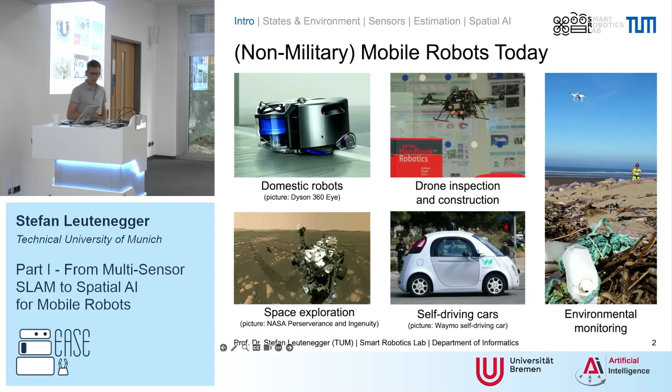So these are the sort of application areas that I work in, that I'm interested in, and that we are working on in my group. So that's what Jörn, I guess, meant with places where no robot has gone before. Maybe a bit of an exaggeration, for instance, for the vacuum cleaner, but I guess they have all in common that somehow they need some sort of localization and mapping and 3D perception.

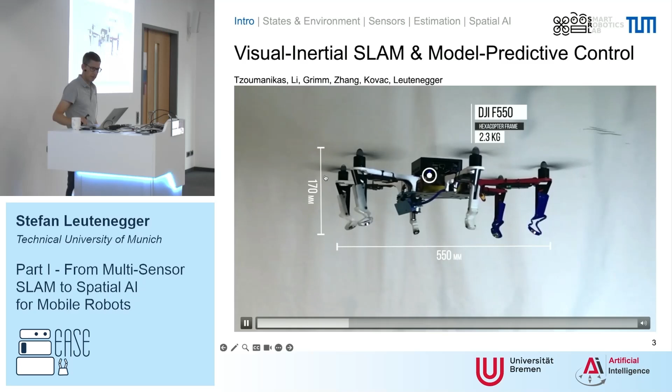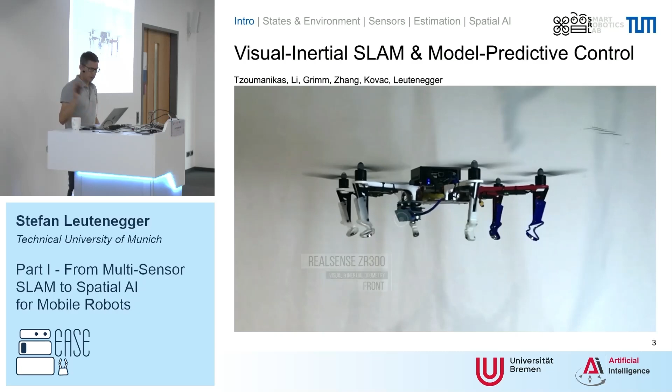And maybe just a real example that we built already a few years ago, just as an introductory example. This was for a competition. Pedro was there as well, I just learned. So we built this kind of off-the-shelf robot and equipped it with some sensors and processors. So there's an Intel NUC on here, there's an RGBD and inertial sensor in the front. And this is kind of like cheap off-the-shelf hardware otherwise. There's also a downward-looking camera.

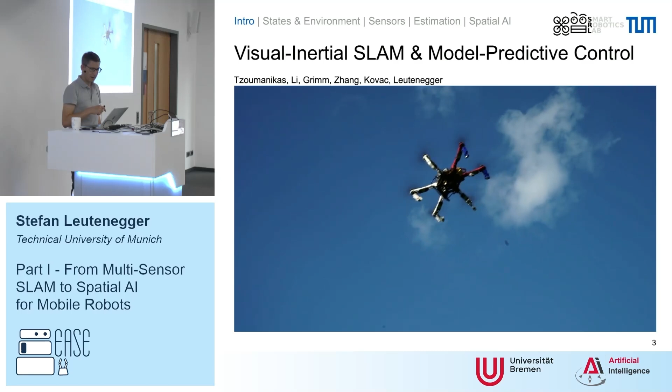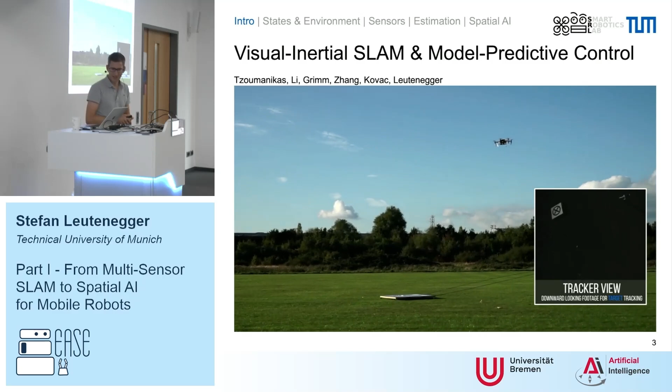Now the goal with a downward-looking camera was to try and find this moving vehicle and then actually land on it. So we did this outdoors, and actually without any GPS. We wanted this to work always, also indoors in any environment. We use some visual inertial SLAM system, and we couple it with model predictive control. We have detected now this moving target. Some people had to run quite a bit on this day, and then it approaches it and lands on it.

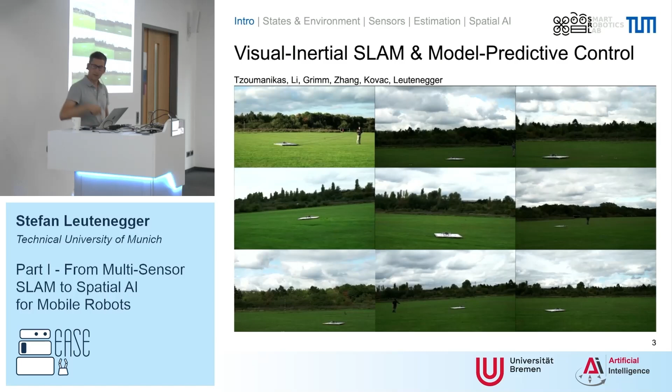So it's actually quite classical stuff, right? Probabilistic SLAM, model predictive control, but it's not so easy to actually get it done. It has to work in all kinds of conditions. You have different wind, you have different illumination. This was still back in London, so sometimes you would even have some sun, and it has to be able to cope with that. So this is just to give you an example of the kind of things that you have to do. This was fully autonomous, right? For the competition, you were only allowed to press one button, and then the rest had to be completely autonomous.

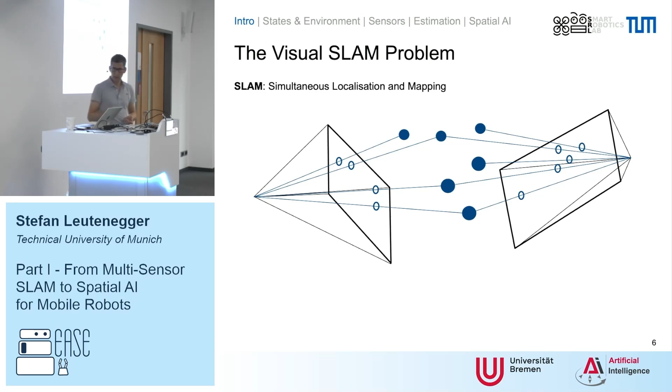Now I will be mostly talking about SLAM and what I call spatial AI here. So let's just look at the very basic SLAM problem. I'll talk about this in a little bit more detail. You assume there is some kind of a 3D structure in the world, some kind of a map, say there's a couple of key points. Now you're observing them by a camera from different viewpoints. Say you have it here first, and you move the camera, and you re-observe it, and you hope that you can now find the relative pose of both cameras, as well as the 3D landmarks here.

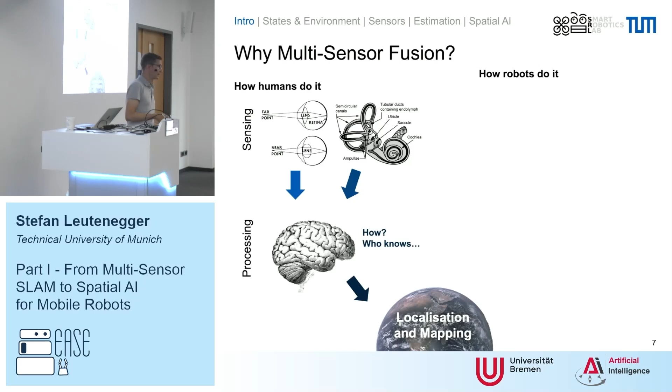Now this is vision only, and a thing that I will also be briefly talking about is that it really works well if you combine different sensors, inspired by humans. We're not just using a single camera, right? We have several sensors. We have stereo vision here, and then in our inner ear we can sense accelerations, we can sense rotation rates, we combine all of this, and we come up with an idea of how we are moving. I have no idea how this works here, right? I can only say that the way we are trying to replicate this is very similar. So we can use stereo cameras, we can use inertial measurement units, and we can use maths to basically come up with the same here.

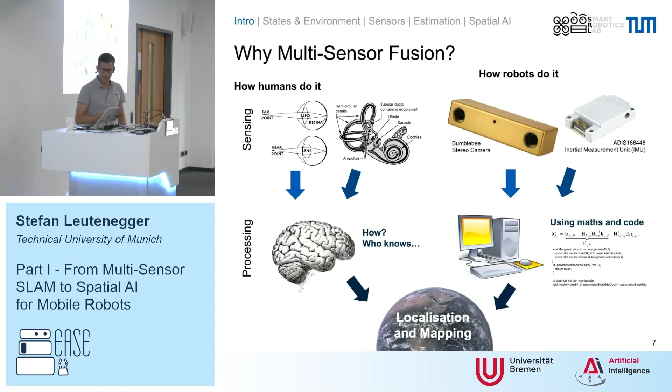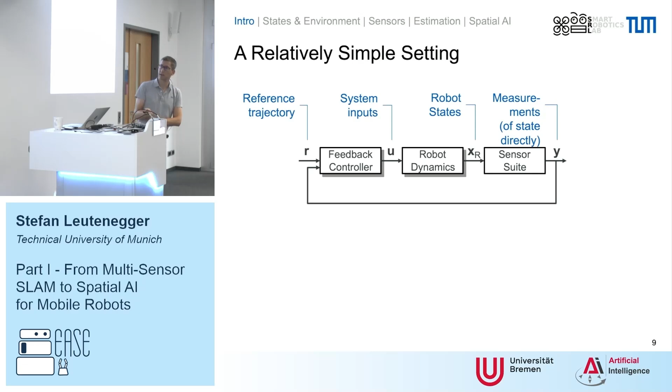Now the problem is a bit, and that's relating to what I said before, that now our measurements here are not directly something we can use for control, right? This might be an image and inertial measurements. So if you directly feed that back, it's really a non-trivial controller, and then you're in some sort of, say, maybe deep learning territory that tries to map these sensor measurements to something that tries to control a robot. That's not intuitively clear.

So what we are now trying actually to do is we're trying to have the state estimator here, right, to reconstruct something that we understand here, positions, orientations, and so on. And then this is something that we can feed back here. Okay, so that's the general idea, and then of course we can also add all kinds of planning in front of this here. Good. I guess some of this is of course repetition for many of you, so also feel free to ask questions if something isn't clear.

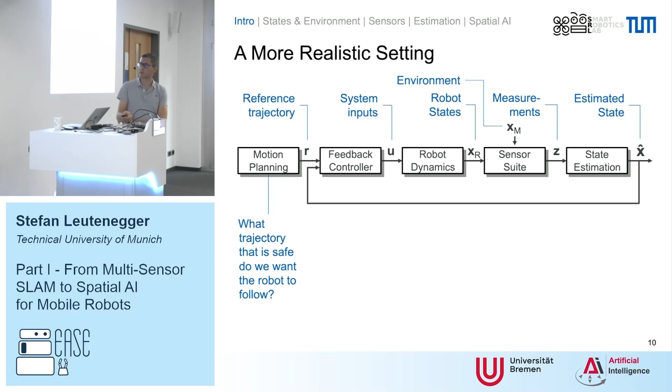Okay, so planning is perhaps all about finding trajectories that are safe, that do what we want. Control is all about finding the commands that get the robot to do the stuff that we want it to do. And then what I will always argue is that it's actually a good idea to leverage the understanding of the robot dynamics in this process of trying to control it, perhaps also in the process of finding trajectories here.

At the same time here, the estimation is all about the best explanations for the states given the measurements. And also here, it's very important that we actually understand the process of how these measurements are generated, I will argue. This helps us finding good estimators here.

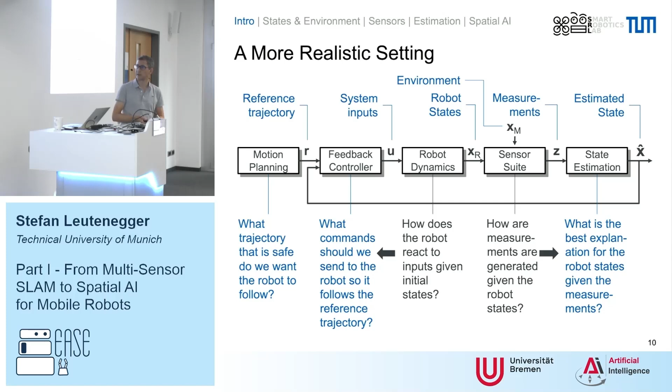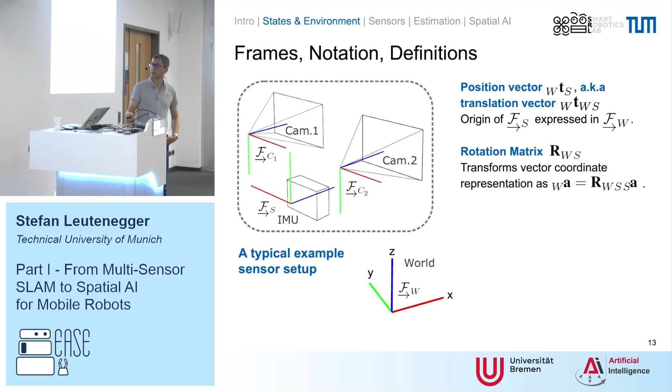So we have the inertial measurement unit, and this would be the S, and then we have the frame W, as I mentioned already. We have rotation matrices that can do the transformations of a vector, right? And for instance, we can use velocity vectors that are now expressed in different frames and so on. Okay, so this is just a bit of notation of what I'm using.

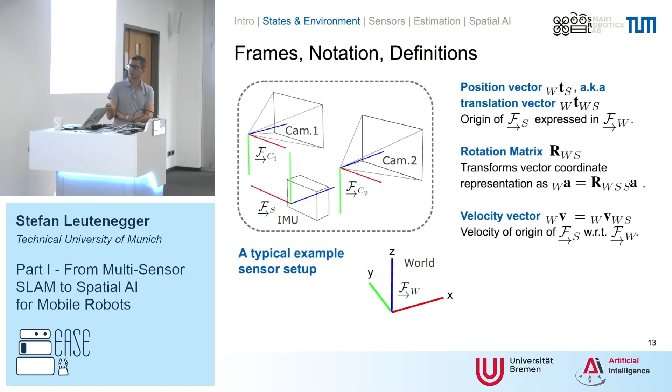And with this, you can now have, for instance, a state vector, a real-world state vector. This is actually from the example I've shown in the beginning, where you have now the position of the robot, you have the orientation of the robot here using a quaternion, you have the velocity, and then a couple of other things. So actually, it's very typical that we have some things that we really need to control the robot. So we have things like position, orientation, we might have velocity here as well.

And then there's some stuff that we just need to estimate in order to be accurate, but we're not really interested in so much. So for instance, here this is an online calibration problem where we also have the relative poses of the camera, say, relative to the inertial measurement unit here. And then what we also have is some biases of the inertial measurement unit for the gyroscope and for the accelerometers. Now this is just an example, right?

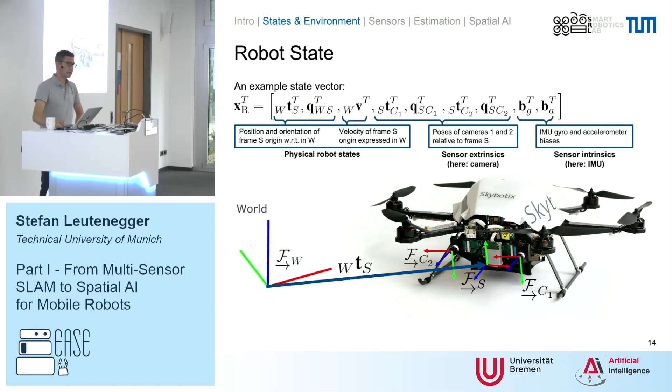But I think it tells us that often we have some kind of physical robot states we are interested in for control, and then we have maybe some extrinsics. This doesn't work so well. We have some extrinsics here, sensor extrinsics, and some sensor intrinsics that we might have. Now, what exactly this looks like, it's up to us, right? We have to decide what is the application, what do we really need, how do we want to formulate this in order to make progress.

And similarly, at the side of the map, maybe even more pronounced, there's a lot of choice. How do we want to represent the environment? And here's just a couple of examples, right? We can work with sort of more 2.5D representations of depth maps. We can use fully 3D volumetric maps. We can work with meshes. We can work with all kinds of point clouds or semi-dense point clouds. So again, it's just a bit of a reminder that we have to choose what really are the right representations to achieve the task that we want to achieve.

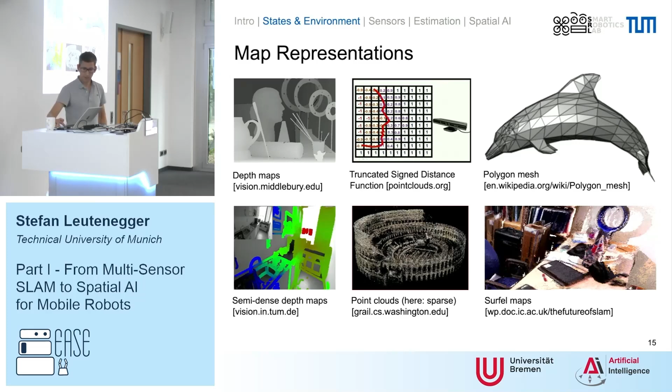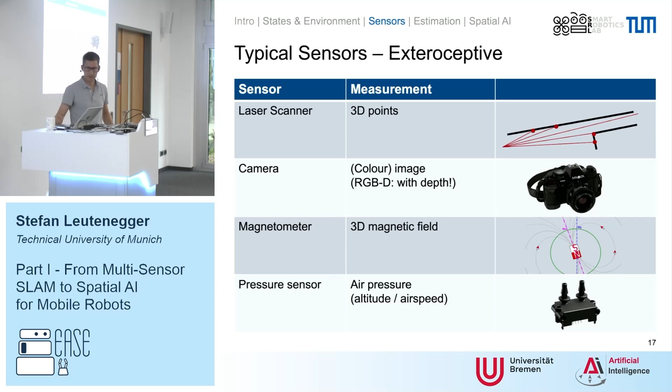Also in terms of sensors, we have to choose what are the right sensors to achieve the task that we want. We have outward-looking sensors, we have things like laser scanners, cameras, even magnetometers, pressure sensors, and then we have the more inward-looking sensors. I put GPS here, it's maybe debatable if this is inward-looking, but it directly gives you the position. And if you can get that, if you're doing some robotics outside, I will argue you should use it. There's no point in not using it. But it sometimes doesn't work, and sometimes is not available.

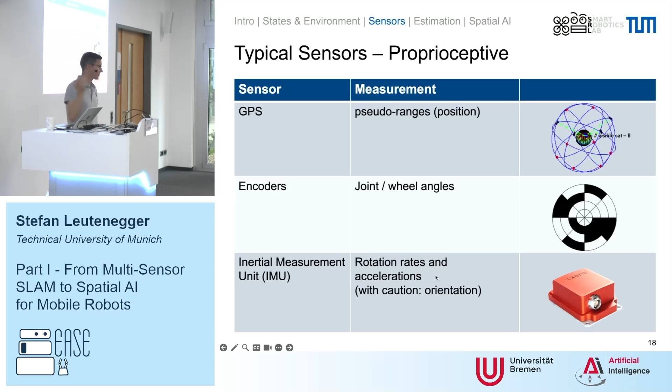We have encoders, we have inertial measurement units, right? So these are the more inward-looking sensors that we can use. Maybe important, the IMUs, these MEMS IMUs that we get, they actually measure rotation rates and accelerations. They don't measure orientations. If you get orientation out of it, it's already some kind of an estimate that has been computed.

So what are the models now for these kinds of sensors? A lot of times we have models like this, right? This is now for the IMU, say for the rotation rates, where you have here the true physical quantity, and then you have all kinds of nuisances. You might have some sort of a misalignment and scale that is multiplied in here to then generate the sensor measurement. You might have some constant bias. You might also have, unfortunately, often some moving biases that are changing over time. And then you might have some time-uncorrelated noise here, and of course some unmodeled effects. So this is the typical model that we'll be using for these sorts of sensors.

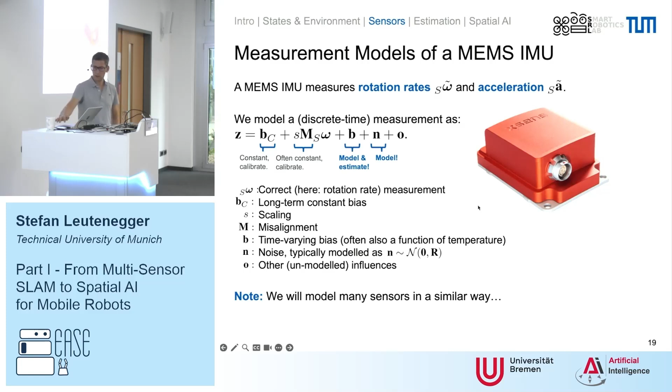Now the camera is maybe a bit more specific, and again, I don't want to bore you. I know a lot of you. So who has already calibrated cameras and worked with camera models?

Okay, so well, probably almost all of you know this. So just to go through this very quickly. The physical process is perhaps also quite complicated, right? But we use a simplified model with the image plane in front of the camera, and then we have this kind of projection here onto the image plane.

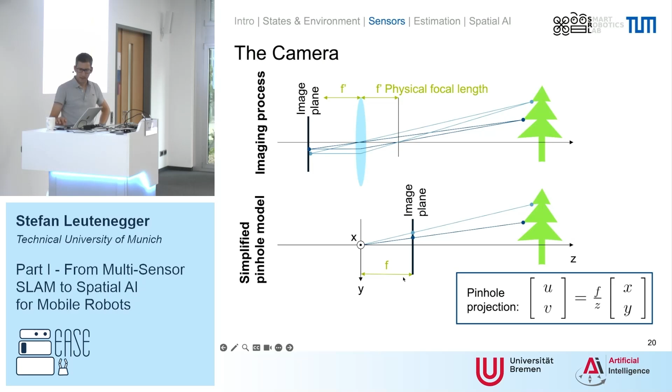And a bit maybe more specifically, the typical model that we use is in 3D, we project onto a normalized unit image plane in front of the camera. So this is just simply dividing by the z component here. And then we are applying some kind of a distortion model to compensate these unmodeled effects, which is just a mapping in the 2D plane. It's a sort of heuristic really of something that people came up with, with a lot of parameters.

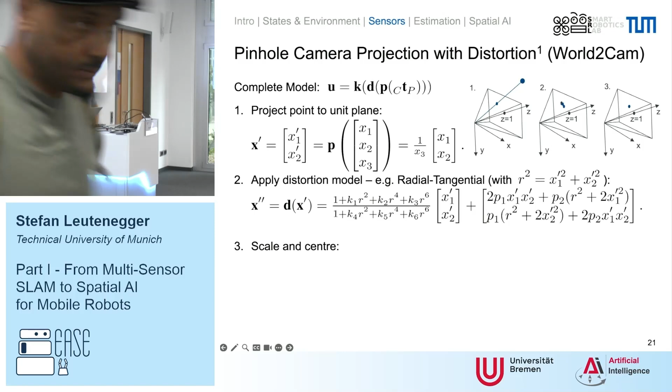And then in the end, we are applying some kind of scaling and centering of the pixel coordinates to the top left corner of the camera as a final step. So this is the kind of model that we'll be using, and we have, of course, all of these parameters that we have to sort of know.

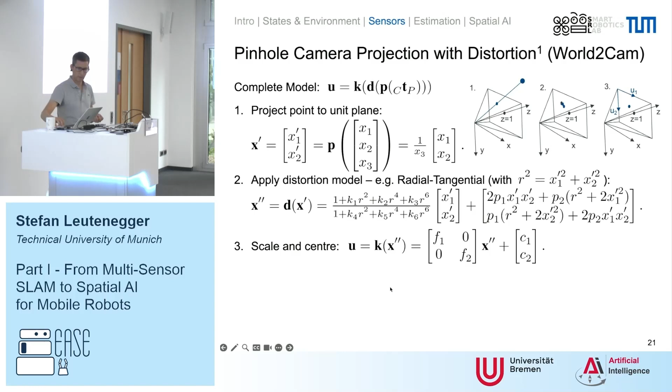Okay, so with this, we are now equipped in terms of knowing how we can represent states, how we can represent environment. We know how the sensors work. We have mathematical models. There are, of course, always simplifications, but we have a forward process and importantly also probabilistic processes of how these things work. So now we can go into trying to reconstruct the state in an ideally probabilistic manner.

So here's the idea. We have these variables to be estimated. Let's call them x. We have measurements, say z_i, that are assumed to be independent. So this is still a vector, so you can still have correlated subsets of these measurements, but the individual index i here are uncorrelated. And you have now some probabilistic measurement likelihood, right? So this is exactly the kind of model that I was talking about before. And maybe you will also have even some prior distribution for x, p of x.

So now what I said is try to find the most likely explanation for these measurements. So this is really mathematically speaking just trying to find the argmax of the posterior distribution here, p of x given z. Now, to get p of x given z, we can basically apply Bayes' theorem, and we'll find that p of x given z is proportional to p of z given x. And that, in turn, because they are independent measurements, is just simply a big product of all of these measurement likelihoods.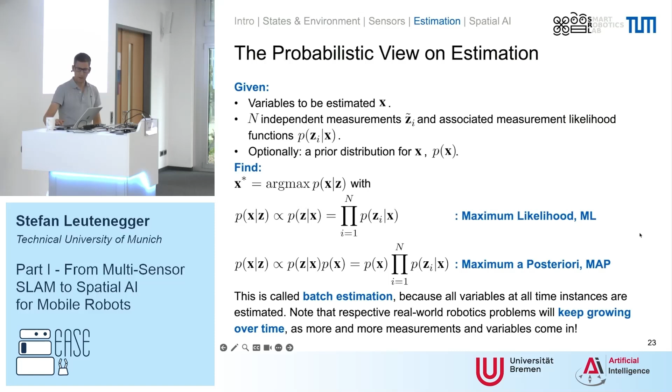Now, with the assumption that these are normally distributed measurement likelihoods, it's a big assumption, right? But we assume that a lot, and we have to at least know what we're doing. But if we are assuming that, then something nice happens. Well, first of all, we find here now this kind of nonlinear model that we have derived, for instance, in the camera projection. So this is going to give our mean, and then we have just some covariance matrix here for the normal distribution that we have to know as well.

Maybe we have also a Gaussian prior here, but if we try to find the argmax of this p of x given z, we can equivalently find the argmin of the negative logarithm of this posterior distribution. And if we plug in all the stuff from before, something very nice happens. You might think, why would you take the negative logarithm instead of just the p of x directly? But actually, now because you have the logarithm of a big product, as I wrote it before, you turn this into ultimately a sum.

Okay, so if we're just simply plugging in now the measurement likelihoods and the prior as normal distributions, you really just can write out the function of the normal distribution. You have this big exponential here, right? An exponential of effectively the measurement minus your model of what the measurement should be, right? And this product of these exponentials will simply now become a minimization effectively of a sum of these kind of squares. So that's very nice, right?

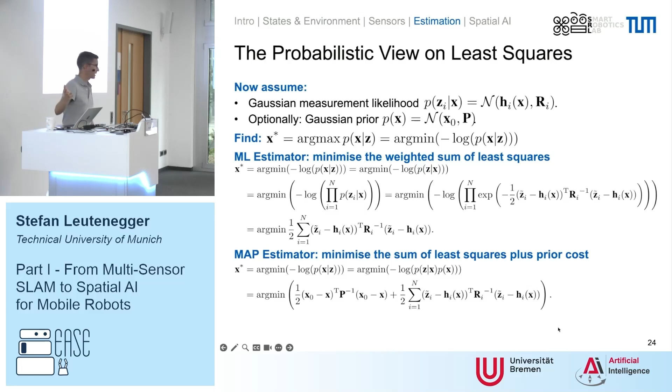And again, remember that this is assuming we have Gaussian distributions. So this is maximum likelihood, and if we do maximum a posteriori, the only difference was there was this additional factor, which was the prior, and this becomes now an additional part in the sum here that is also containing the prior. So it's basically very, very similar. All right. So this just to show you the probabilistic interpretation of what we do a lot with least squares minimization. Now, of course, the question is still how do we solve this?

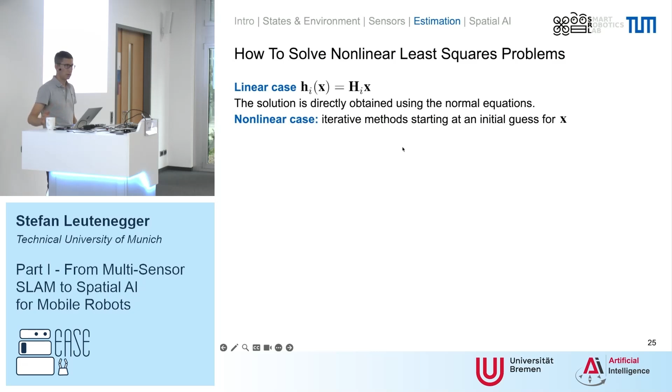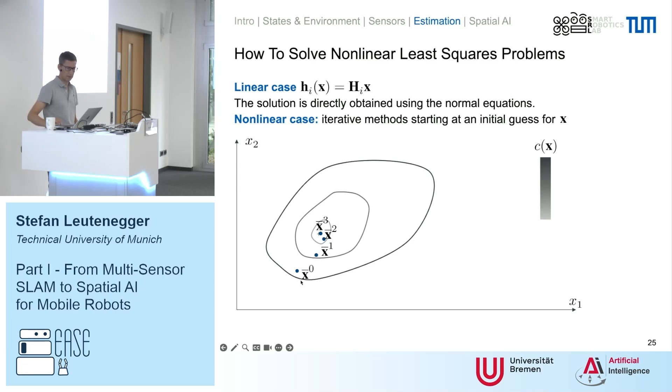In the linear case, if we have a linear mapping here from the state X to our measurement domain, then we can directly find the solution via the normal equations, right? Linear least squares, you have a direct solution. In the nonlinear case, we have a cost landscape that's now not exactly quadratic, so we're trying to iteratively, with a starting guess, find the minimum, right? And the way that we can do that is we can use linearization.

So we can formulate these error terms that appear in the least squares problem, right? So measurement minus your model h of x. We can denote that as an e, and we can simply use linearization now. So the idea is that we approximate this nonlinear function using the Taylor expansion here. So we have the Jacobian matrix E evaluated at some x bar. So you start with an initial guess. You evaluate the Jacobian matrix at this initial guess, right?

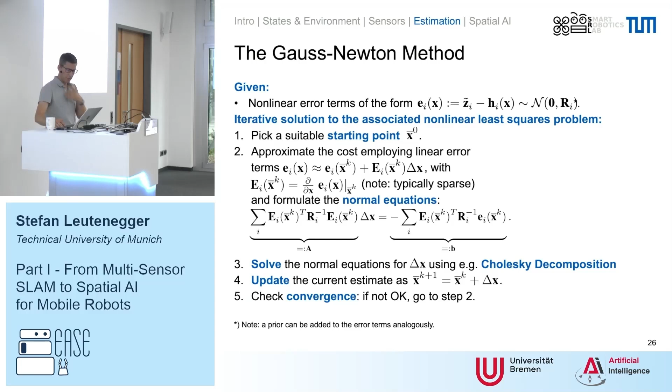And with that, then you can just, again, formulate the normal equations. You solve the normal equations having used the Jacobian here, okay? And you can compute with that an increment on the state, and basically, you solve for it, you apply it, and then you iterate the whole thing. So this is the Gauss-Newton method that falls out very naturally with this idea of having nonlinear measurement functions that we simply linearize. And with that, once we have a linear problem, we know we can just solve the normal equations. So that's a general idea of how we can solve these kind of problems. Of course, you have to check for convergence and then iterate this thing.

So now going back a bit to the problems that we try to solve in robotics, we typically can now distinguish localization problems where we are trying to find the argmax of only the position of the robot, or the pose of the robot, given the map. So here xm is the map. So here we assume that the map is given, and we have also given, of course, our measurements, and also u here. Maybe this is controls, maybe this is odometry measurements, right? So here we're only trying to solve for the state of the robot.

And now there are recursive and batch formulations of this. So in the recursive one, we are only trying to solve for the current robot state, and in the batch one for the entire trajectory of where the robot was. So that's localization, right? Important to know: in localization we assume the map is given, is static, and is somehow given to us.

In SLAM now, however, we are trying to solve for both the robot state and the map, okay? And again, here there's recursive and batch formulations. In the recursive formulation, you're only trying to find the current robot state. You're not interested in all the past robot states. So far, we've only talked about batch estimation, really. Mapping is kind of like the complement to localization, right? So you're trying to find what the map is given the robot states.

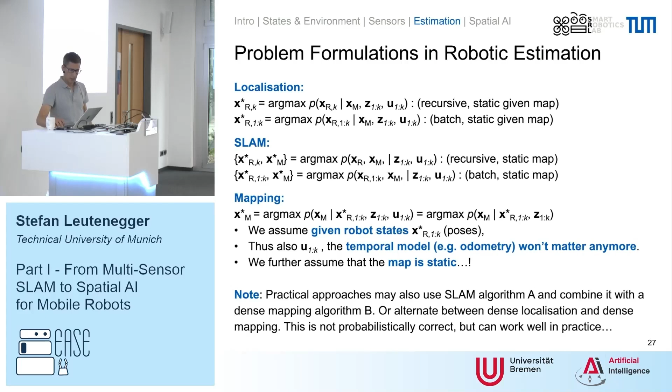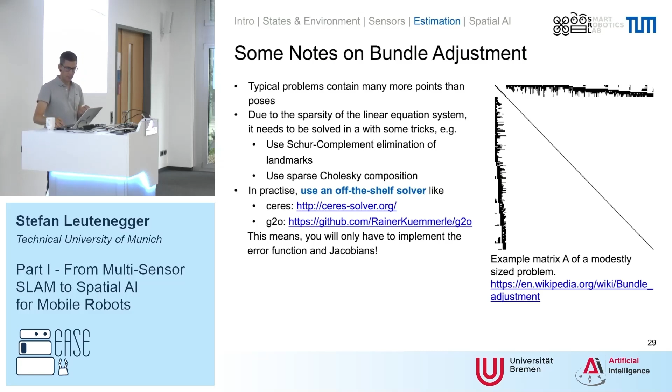Okay, so far I have talked about measurements that are happening in the image, but we haven't talked much about temporal models, about how things are correlated over time, and I wanted to briefly talk about that next. So here's an example of what you can do taking into account dynamics.

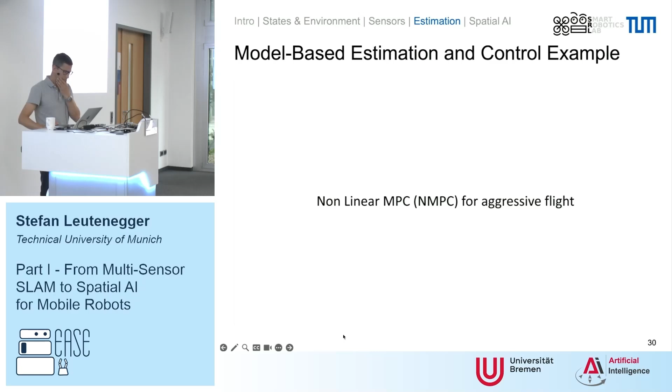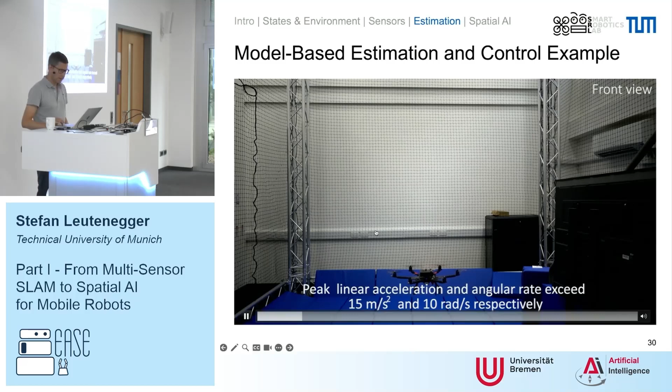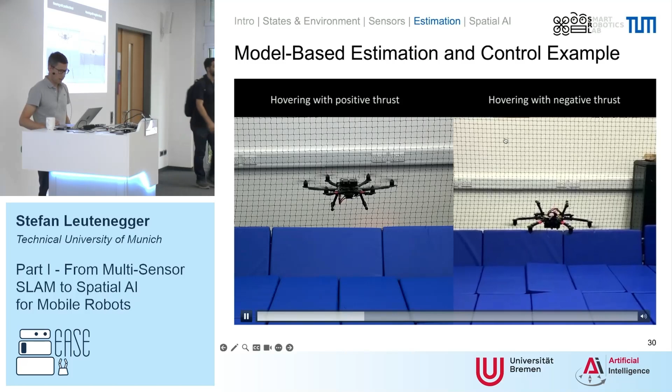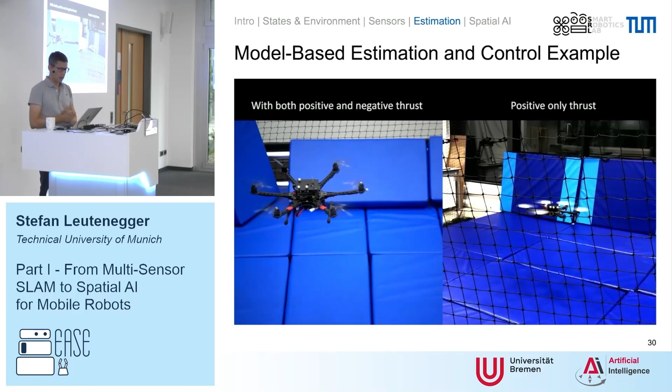So here we're flying a drone, and we have identified the nonlinear dynamics of that drone quite well. This is something you can actually do quite well, and then you can apply model predictive control that exploits the knowledge of the dynamics, and it runs this forward simulation on board to find the optimal control to follow the trajectory that you want. And the nice thing is it really works in all kinds of unseen states, right? So it's not like a learning problem where you have to make sure you have learned all possible states and events, and it will just work.

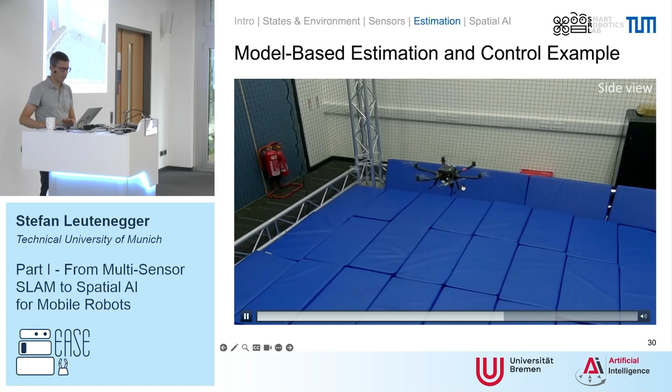The other thing you can do using the model, and that's an estimation problem, is you can try and find how the model matches or doesn't with what you observe. So here, for instance, we disabled a rotor and didn't tell the drone, and the drone compares the temporal model to what it observes in terms of attitude and altitude, and it can figure out that a motor must have stopped, and it can save itself, right? So then the controller can be adapted accordingly.

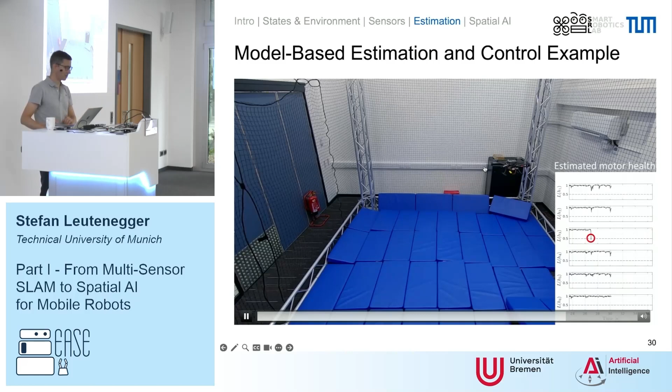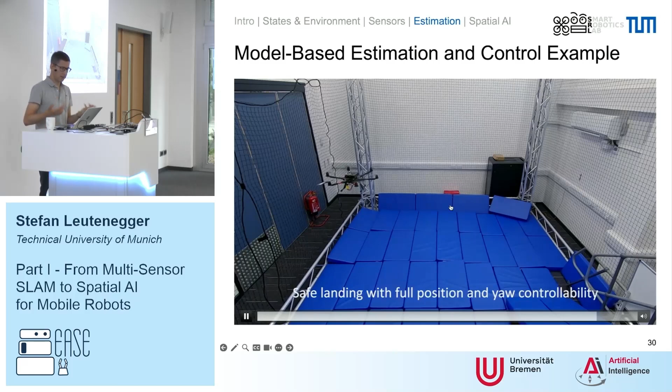You just tell the controller, okay, your motor doesn't work anymore, and automatically, because you have this fully physics-based nonlinear model, it can save the drone and it will still work. So here, importantly, we don't tell the controller that we have turned it off. It has to find out before it crashes, and it does, and then it can continue to fly, right? So these kinds of dynamical models are incredibly useful, I find, in estimation and control. So let's briefly talk about that.

Also, just to show it doesn't only work once. Here you can see we did, this is actually 16, I think, successive experiments that we did where it didn't crash. So you can always do a paper with one experiment where things work, right? 16 in a row is a bit harder.

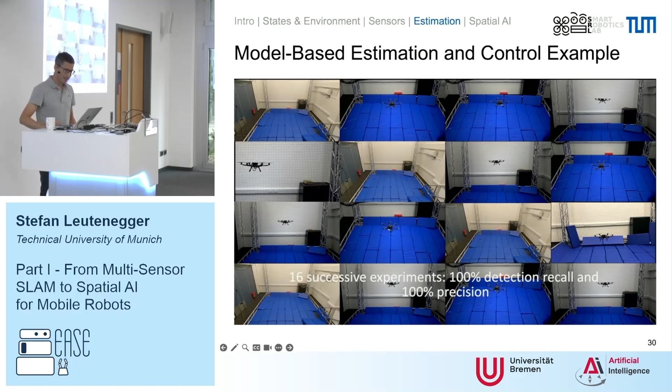Okay, good. So the kind of temporal models that we are using, they're often coming from physics, which live in this kind of continuous time world. So we formulate them in continuous time. They're often, unfortunately, also nonlinear models. So you have here the time derivative of your state, which is a function of your state, inputs u, and then maybe there's also some noise involved here, w. And then maybe also considering some nonlinear measurements already here.

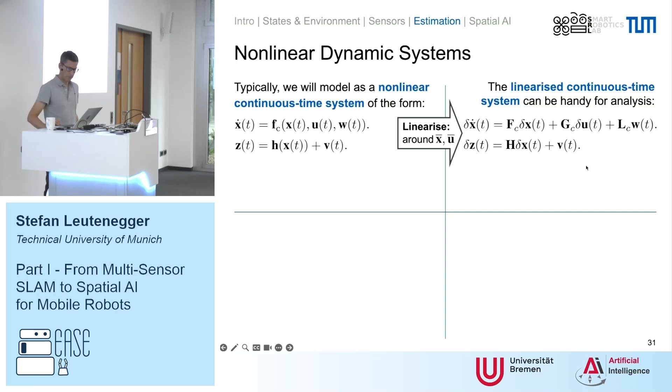What we can always do is we can linearize them, stay in the continuous domain, or, and this is what we will be doing most, is to go into the discrete time world by integrating from a time step t_(k-1) to t_k, and then we get a discrete time model here, right? This is still a nonlinear discrete time model using numerical integration. So it's still nonlinear, but we can also use linearizations thereof for various things.

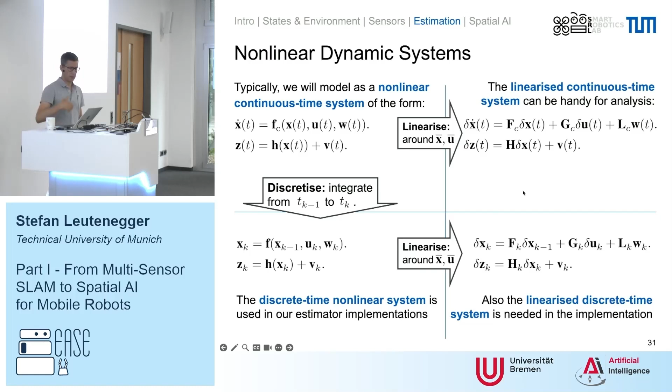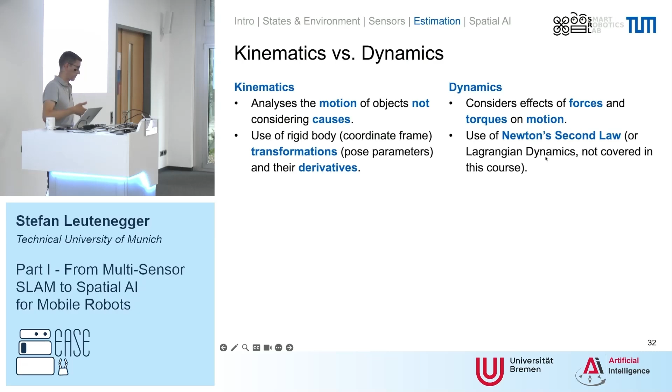Also, I want to distinguish kinematics versus dynamics. In kinematics, there are also temporal models, same as dynamic models, but you're actually only analyzing motion and not considering causes. So you're doing things like transformations and derivatives of transformations, velocities. In dynamics, we're actually going into really the causes. We're looking at forces, we're looking at torques, and how rigid bodies react to them using Newton's second law.

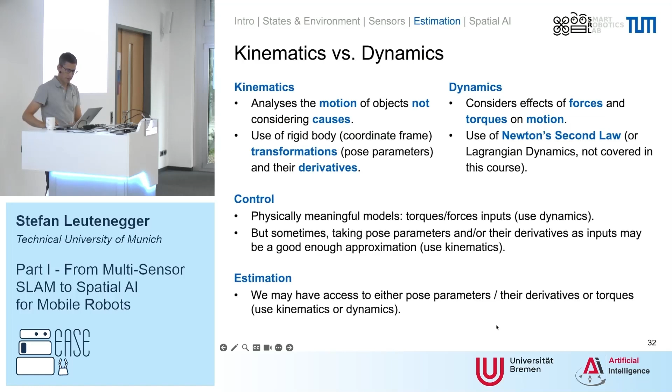Okay. And now we can start to use these things in estimation and control. So for instance, we can look at IMU kinematics. This is really actually directly following out from maths here. We can build this kinematic model. Say the time derivative of the position is just simply the velocity. The time derivative of the orientation now here becomes a little bit more complicated. We can use quaternions here, for instance.

But what we can see, and I'm not explaining all the details, right, is that the time derivative of the quaternion is something that's somehow proportional to the rotation speed that you're measuring here with the IMU. Now, unfortunately, we also have biases that we have to compensate. So this would be the true kind of rotation speed. So we have to compensate with biases, and we have to also account for noise that is entering the system here. And this is now, unfortunately, somewhat nonlinear, right?

Velocity, that's maybe a bit easier again. So if we take the time derivative of the velocity, we get something like acceleration, right? Now the acceleration in the IMU will be measured in the inertial measurement coordinate frame, so we have to transform it back into the world frame if you want to have the velocity in world frame. So here is also some nonlinearity, right? We have to do the transformation here, and this is where the orientation quaternion is basically part of this rotation matrix, right?

And also here with the acceleration, we have to deduct the bias, and we have to account for noise that is entering the system. So this is a probabilistic, stochastic process, really. We have to also take into account gravity. So the accelerometers, they will also measure gravity. It's not the true acceleration in that sense. So we have to compensate for it here, for it to be the true acceleration.

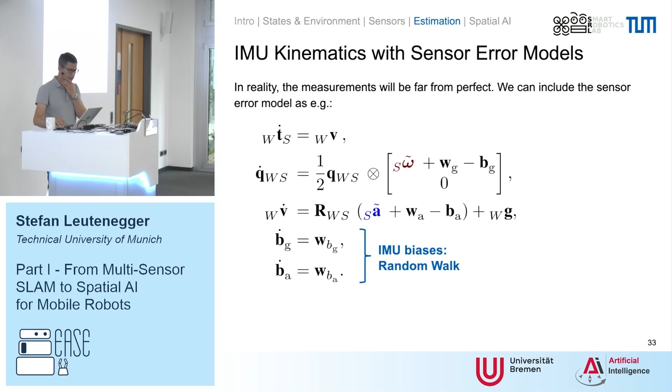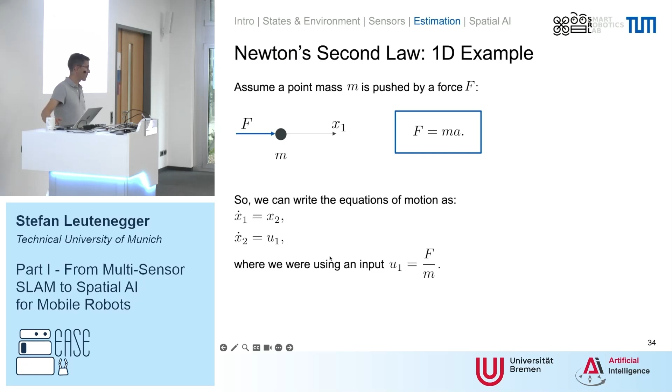Okay, so this is something that we can use now to formulate estimators and control as well. If we're talking about dynamics, of course you're all familiar with Newton's second law in one dimension, right? And you can simply write out the equations of motion for that. Now, unfortunately, it's going to be a little bit more difficult if we have general rigid bodies, but the idea is still the very same.

All we have to do is find all the forces and torques that are acting on these bodies, and then Newton's second law formulated for rigid bodies will tell us the equations of motion, right? So not deriving them here; it's somewhat non-linear, unfortunately. But the things that we have to do if we want to actually use these models reduce to finding the forces and the torques.

So this could be, for instance, on a drone, the individual thrusts that you have from the propellers and the weight force, and then you have to know the inertia and the mass that you have to plug in here, right? So these are the kind of things that you can now do with this. So these will also be models that we use.

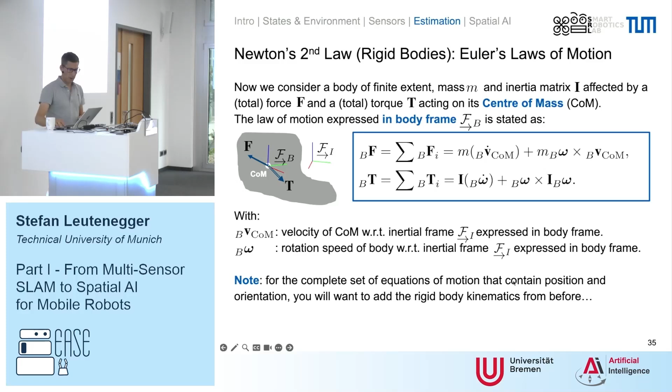Okay, so how does this all help us in estimation? Well, now we can actually do recursive estimation. For recursive estimation, you need a temporal model. So we have a starting state here of a robot, for instance. So you have a distribution for where the robot is. This is a two-wheel robot, a diff drive robot in this example, just a 2D estimation problem.

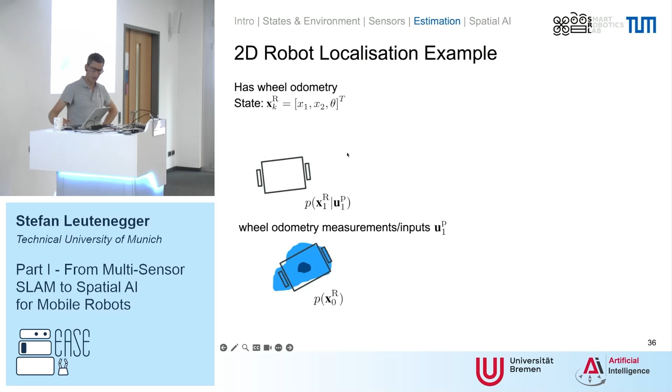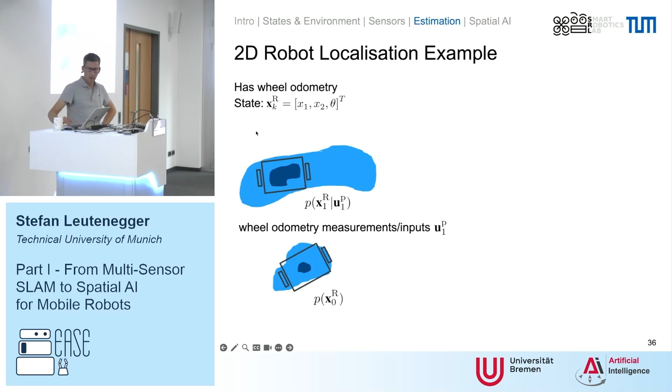So you assume there is some probability distribution of where this robot is, and now you can take, say, wheel odometry measurements, or you can use your dynamical model with Newton's second law that you formulated and apply it, and you can find the new distribution of where the robot is at the new time instance. And the idea is now that you're making some kind of a measurement to reduce the uncertainty again, right?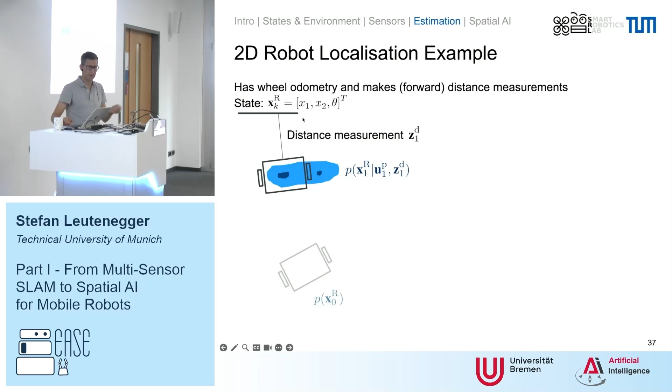So with the probabilistic temporal model, your uncertainty will always be growing, and now you're making measurements to shrink it again. For instance, it could be distance measurements here, right? And it has shrunk. Now the problem is that nobody ever knows the true distribution. There's no such thing. So what we will be doing is approximate it. You probably have done things like particle filters, so that's one way, approximating this distribution with a discrete set of particles.

Or, and that's what I'll be mostly talking about, we can approximate these distributions with normal distributions. You might say, why would you ever use normal distributions when you can do more accurate things with particles? So maybe the question here, just to check whether it's too hard or too easy: why would you do one thing or the other? Normal distributions boil down to using algebra, so it's very fast. It is fast on computers, right?

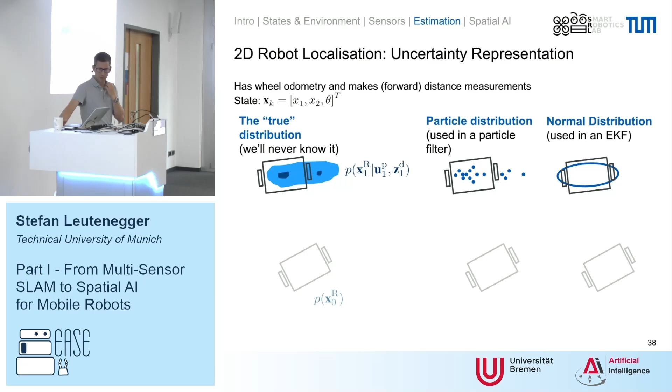So if that's so fast, why are people using particle distributions then? Sometimes you can just increase accuracy by buying more power and increasing the number of particles. Yes, this is right. Maybe someone has something to add to that. And maybe you say, well, if I just need more power, I'll just buy a bigger computer and only ever do particle filters, and I'm done.

You might have to sample particles from the whole map. Yes, I think you're getting into this direction. So you might have a huge space from which to sample particles, especially with an initial state that is unknown. And maybe even worse, you have what is called the curse of dimensionality, right? So in 2D, you might get away with particles.

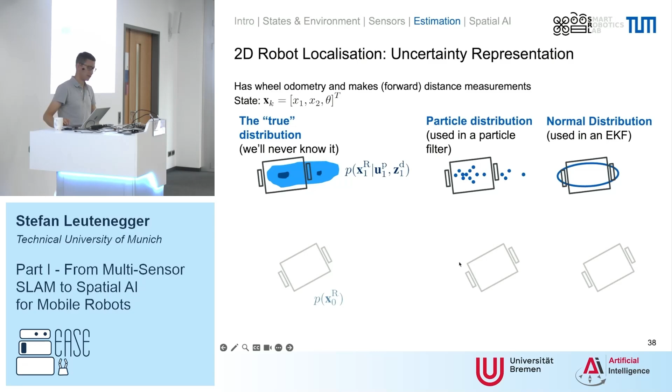However, if you're estimating a bigger state where things are correlated, with orientation in full 3D and the 3D position as well, then at one point it becomes intractable to work with sufficiently many particles, and you can still do things very efficiently assuming normal distributions. So the maths becomes very efficient. So there's no one answer. Sometimes one thing works, and sometimes the other. So you have to analyze what's feasible.

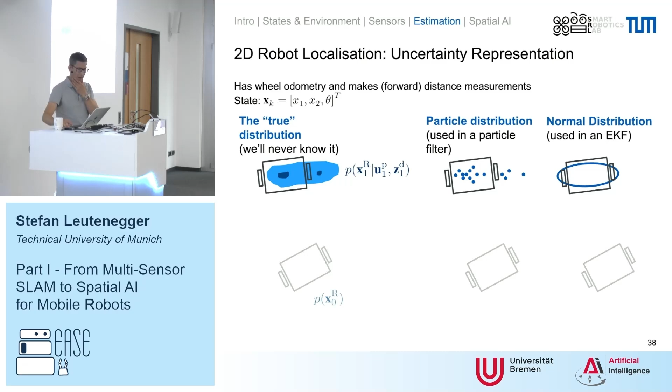Okay, so the way we are doing this is that basically now we can factorize the probability distribution in this way, that we have a starting state here, and then we have the next state, which is now dependent on our odometry measurement or our model and controls, and then we are making a measurement Z here, and the whole thing repeats. And we can actually write down this whole joint distribution with the starting distribution, then the temporal model here, the state transition model, and then the measurement likelihood. So this gives us the distribution of all of these things, right?

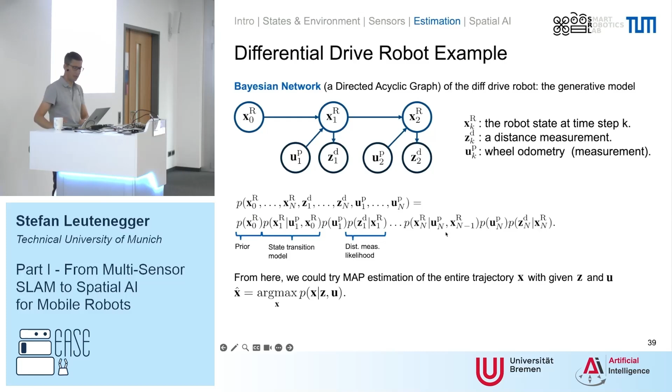But what we now try to do in recursive estimation is to actually only get the current state, right? So we have to marginalize out other things. And this is now exactly what we will be doing. If we instead tried to find the argmax in this distribution, we would be back in batch estimation theory. So now, however, we are trying to actually marginalize out stuff.

So the way this now works is that in practice, you can alternate a step of prediction where you take your previous distribution and apply the temporal model. So this is a step here where you just simply plug in your temporal model. But now you have actually the distribution of your previous state and your current state, and you're not interested in the previous state anymore. So you're applying marginalization here. You're integrating out the previous state, and that's then your prediction.

And in the update, this is simply an application of Bayes' theorem. Right. So you're multiplying here the measurement likelihood, and it's kind of a similar idea as what we have seen before. So with that, this actually is very nice. This gives you directly now also the particle filter equations, and it gives you also directly the EKF equations.

In an extended Kalman filter, we are assuming that there are Gaussian distributions everywhere, and also, unfortunately, because we don't typically have linear state transition models and linear measurements, we have to apply linearization. So that's the kind of hack that we do. So we have this discrete time state transition model that we can now apply, with our odometry controls and where there is some noise entering the system, as we've seen before.

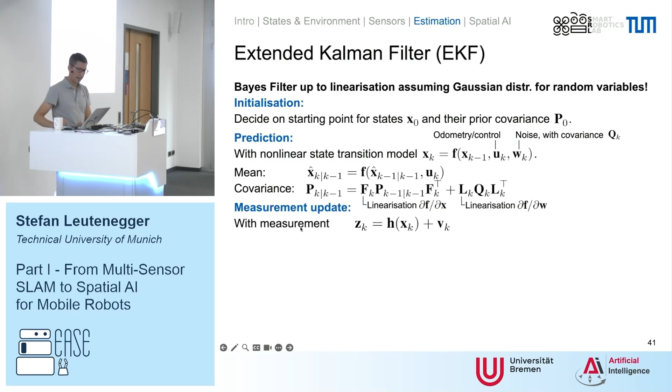And with that, we can propagate mean and covariance. So for the mean, we just plug it into the equations. For the covariance, we use the linearized state transition here. And then we do the measurement update. And, again, I'm not deriving the equations here, but basically what you're computing is a bunch of stuff with matrices. This is just a recipe.

And what you will be doing, again, is this kind of idea that you've seen before, that we're formulating this residual, where you have the measurement here that is compared to the model. So we have our nonlinear measurement model here, where we plug in the current state estimate, and we can take the difference between the measurement that we have seen and the model. And this gives us an update in the end.

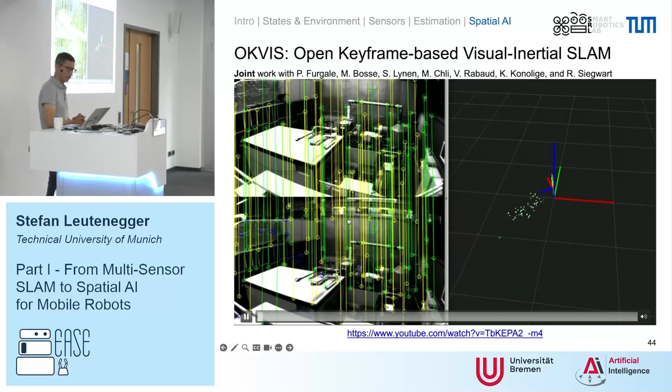Okay, so with that now, just a few examples of how this can actually be applied to the kind of problems that we want. So this is now an example of such an estimator, a visual inertial estimator actually. So you'll always have to still find these kind of 2D keypoint measurements. This is now in a past keyframe. You have to find the matches, and then you can run such an estimator here that is trying to find the trajectory of the drone as well as the 3D landmarks.

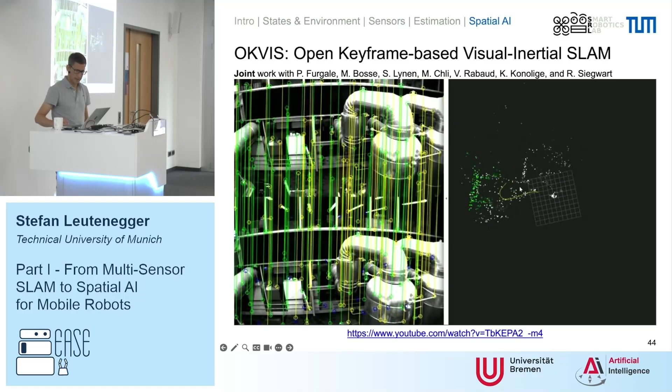Right, so this is a visual inertial system, and it's running a windowed batch estimator that can do this. So I'm slightly shortening this. So this first part of the landmarks is actually not so easy, right? First of all, you have to find the same keypoints across the different images. So you have to have an algorithm that gives you somewhat the same locations if you give it a different input image. And you have to then find a matching algorithm, say a descriptor matching algorithm, that should reliably be able to distinguish which one matches where.

Another thing that in practice you will want to do: you might get drift as you're going around the loop, right? And so you might have a place recognition module that finds, oh, now I'm actually here, instead of where I previously thought I would be. So you might want to apply so-called loop closure that then tries to optimize the whole trajectory again, trying to minimize the deviation of the relative poses that you had around the loop.

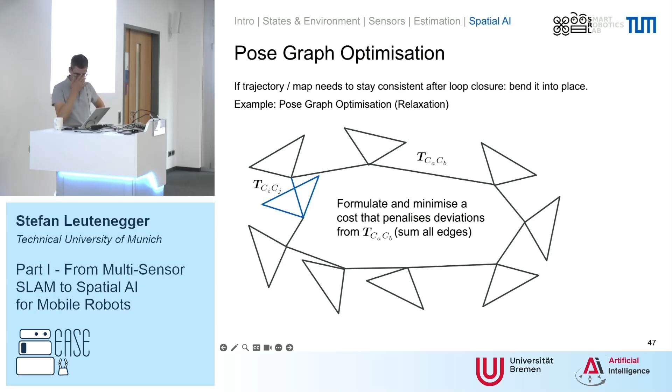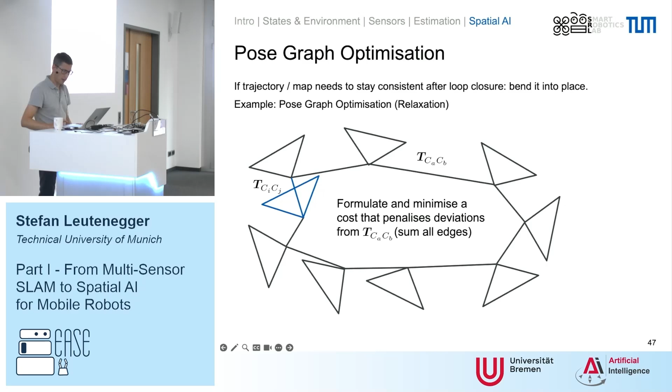Okay. Now, I've talked for a long time, and I have a few slides left, but maybe let's include this into part 2, because